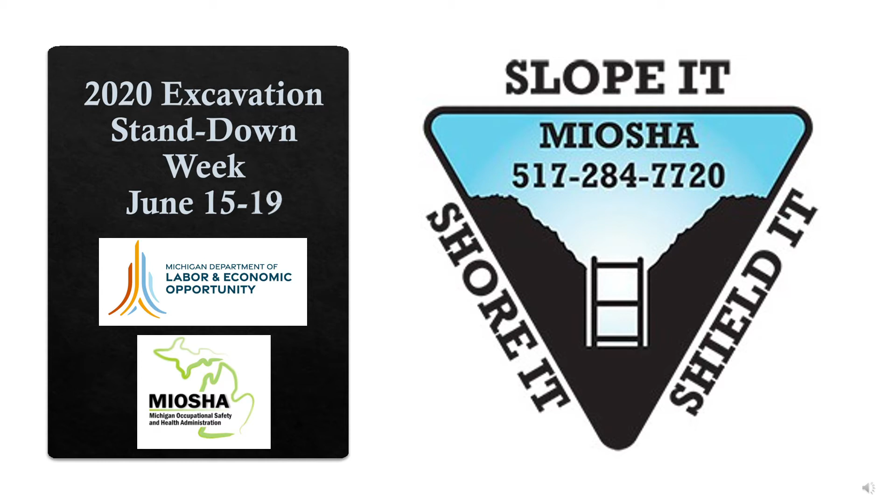This month's safety video will align with the 2020 Excavation Stand Down Week, which is the 15th through the 19th of June. It's put on every year by MIOSHA to increase the awareness and the importance of trench and excavation safety.

So here's some statistical data relating to construction fatalities and also excavation fatalities. So you can see that ultimately over the last 28 years, we've definitely been trending down. But if you look prior to 2007, we had some peaks upwards for total construction fatalities, just under 35, which is definitely unacceptable. Following 2007, you're looking at the excavation fatalities kind of stay steady at 1, maybe peaking at 2. And then we had a spike in 2016 for total construction fatalities, although the excavation fatalities remain unchanged.

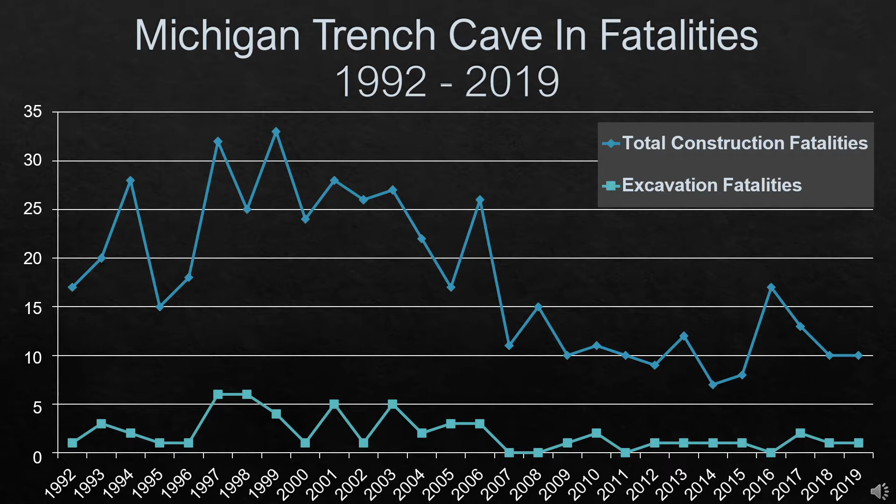So ultimately, our goal is 0 for both construction fatalities and excavation fatalities, and that's what we need to strive for each year. Now we're going to take a look at some of the top violations that MIOSHA has cited over the last couple of years. The first being having a qualified person on the job site. We'll go into that further. Spoil piles, MISS DIG, access and egress out of a trench or excavation, and also cave-in protection.

So the first heavily cited violation is a qualified person. So that's just having a qualified person on site, having that qualified person understand their roles and responsibilities, and also having that qualified person be able to perform routine inspections on any trench or excavation to check for evidence of any possible hazards, slides, or cave-ins, and be able to stop work in any of those situations that exist.

You may have also heard of a competent person. The two terms, qualified and competent persons, are synonymous. OSHA uses the competent person term, and MIOSHA uses the qualified person term. At the end of the day, it's just important for the qualified person to always be on site to be able to perform these inspections, but also if any type of inspection were to be completed by MIOSHA, that person needs to be able to identify themselves as the qualified person on site who is able to carry out their roles and responsibilities.

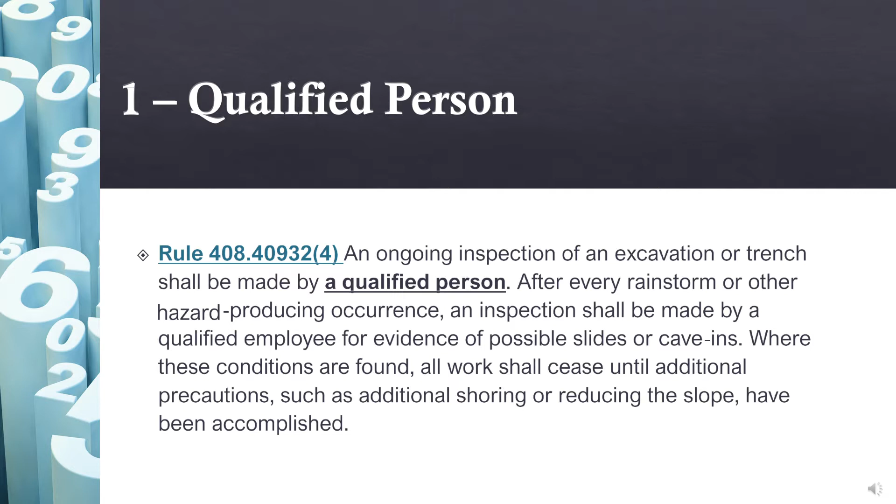The next heavily cited violation is spoil piles. This should also include any type of materials and equipment that are also present on the job site or near an excavation. It is vitally important that these spoil piles, any materials and equipment, remain 2 feet from the excavation edge. This is to prevent any of the spoil pile from entering back into the excavation, or any materials and equipment falling into the excavation where workers may be present. It is important to always measure if you're unsure and maintain that 2 feet at all times.

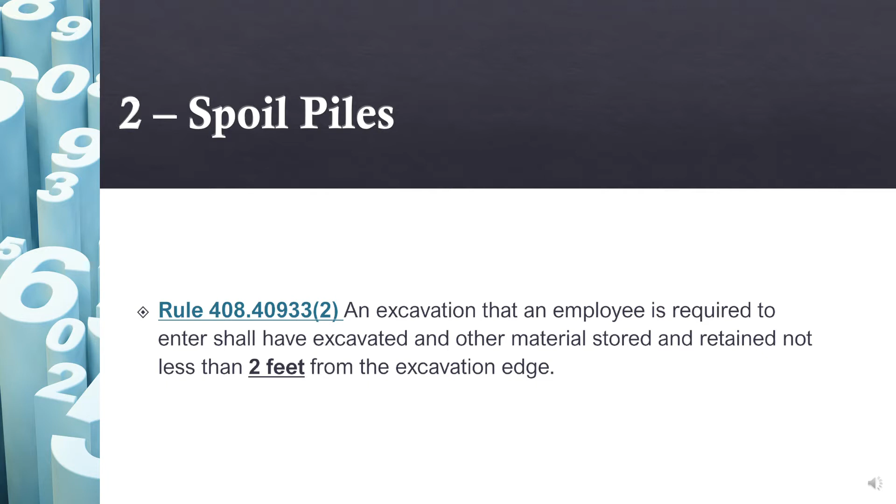Next, we're going to talk about MISS DIG 811, also known as Public Act 174. And this requires any company or any persons to contact the MISS DIG system via 811 3 days prior to any excavation to have all of the public utilities marked so they're able to be exposed and not damaged. This is not only for the safety of the public, but this is also for the safety of the employees that are present on the job site.

This is regulated, and compliance is assured through MIOSHA, but also through the MPSC. And because we work for the utilities, the MPSC does look at us heavily to ensure that we are following Public Act 174, that we're calling in tickets 3 days in advance of construction, but also that we're checking positive response to ensure that all public utilities in that area where the excavation is to be conducted have responded, and all utilities have been marked.

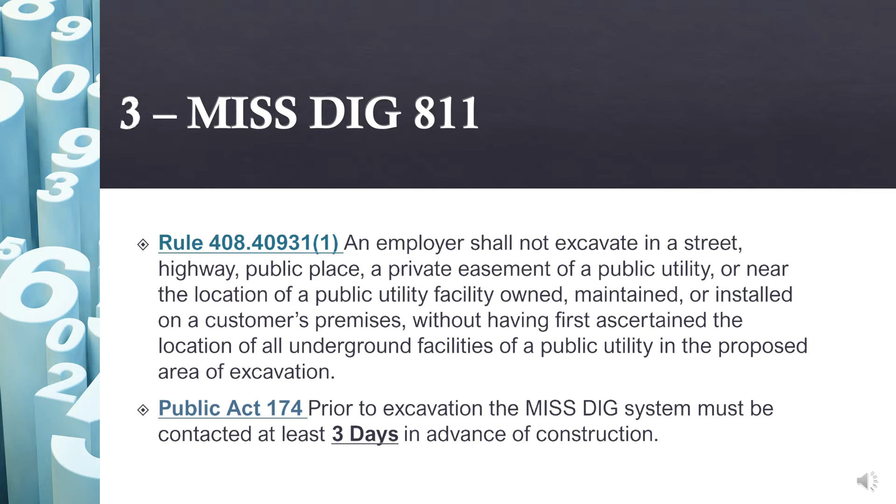So having access and being able to egress out of a trench or an excavation is one of the single most important things in trenching and excavation. It is required in any excavation or trench 4 feet or more in depth, but can be used in anything less than that. You know, when you're talking about trying to enter an excavation, if you're talking about uneven ground, it's better not to be jumping in or dropping into an excavation. It's better to properly go down the ladder and make safe entry into the excavation or trench.

It's also important that, when you're talking about lengthy trenches or excavations, you have a way of access and egress not to exceed 25 feet. So you need to be within 25 feet of any ladder or ramp to be able to egress should any protective system fail or any of the trench or excavation conditions, soil conditions change.

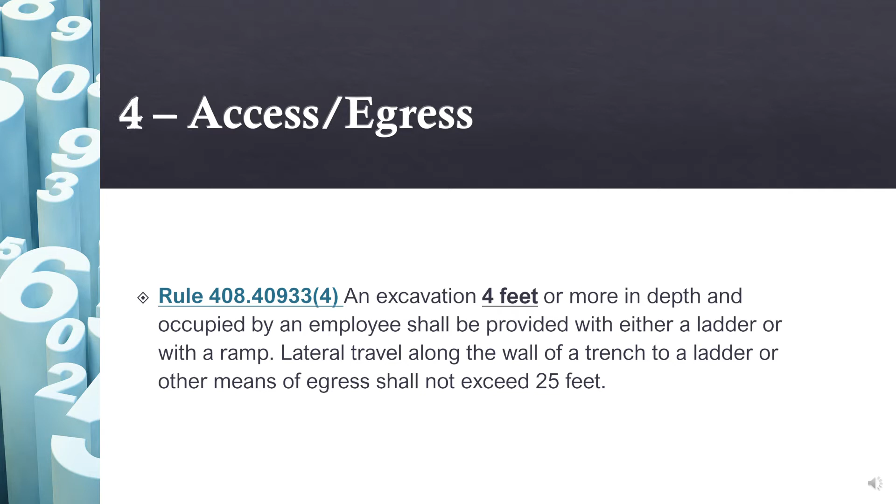Cave-ins are responsible for the majority of fatalities from any trench or excavation. So it's important that we follow this rule to a T and that we ensure that we have a protective system in place in any excavation 5 feet or greater. It's not saying that if you have unstable soil less than 5 feet that you don't need a protective system, but this is the rule and this is what is regulated by MIOSHA.

We've all been on job sites and seen other contractors put their employees at risk in excavations much greater than 5 feet with no protective system. We are definitely not that company, and that's not how we're going to conduct ourselves. So it is important that the qualified person on site ensures that if he has an excavation that's 5 foot or greater anywhere along the perimeter of the excavation, that we have a protective system in place and that it is used properly in accordance with the manufacturer's specifications.

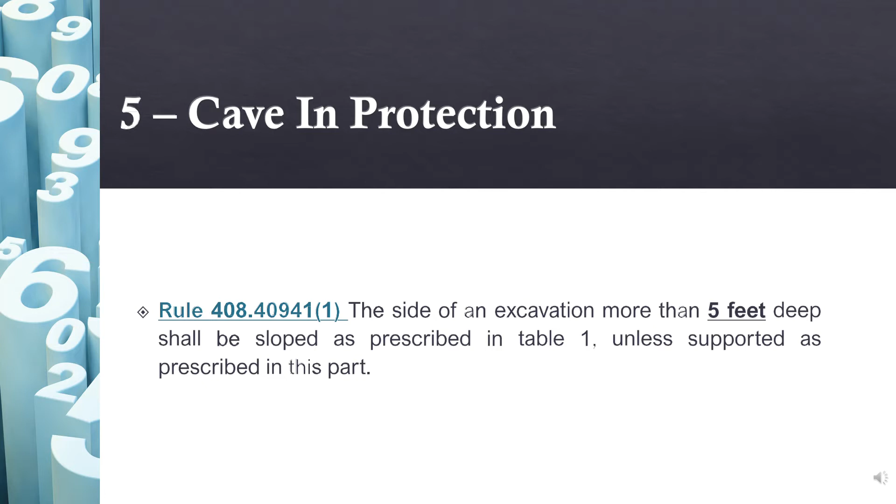Okay, to review some of the things that we talked about and also to go over an easy way to remember the basic rules for excavation and trenching, we're going to go through the 1, 2, 3, 4, 5 rule. So the first is at least one qualified person must be present on a job site. This qualified person needs to understand their position, needs to be able to do routine inspections to make sure conditions do not become hazardous. And if they do, they need to call for the stop work or immediate egress out of the excavation or trench.

Next is spoil piles, materials, and equipment shall remain 2 feet from the edge of an excavation or trench. This is pretty self-explanatory, and again, the 2 foot does not need to be encroached upon. Next, ladder shall extend at least 3 feet above the excavation or trench. If you're using a ladder as an egress point, you need to see 3 rungs outside the top of the excavation, and that will give you your 3 feet. And that is to be able to have a handhold when you're exiting onto the landing area outside of the excavation.

Next, ladders are required in excavation or trenches greater than or equal to 4 feet. You need to have a way to egress if you're in a trench or excavation that is 4 foot or greater, but also any excavation that you feel like there's uneven ground, that you feel like a ladder will be safer to use, there's no harm in doing so.

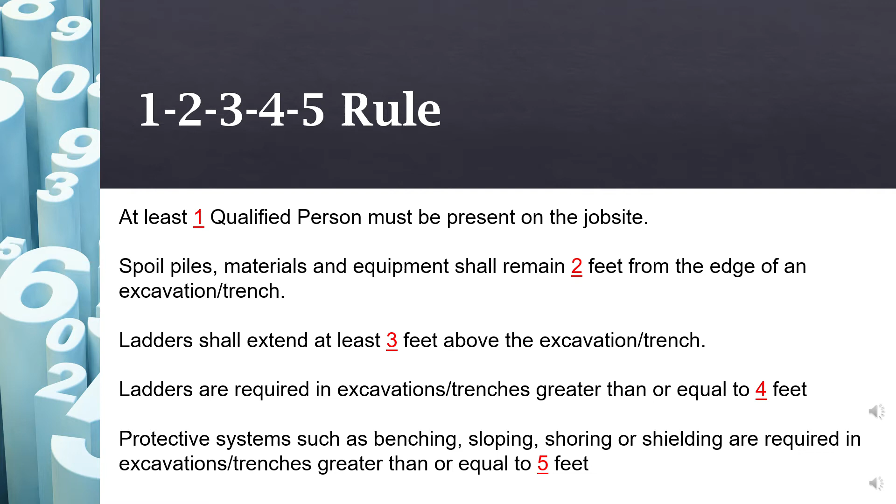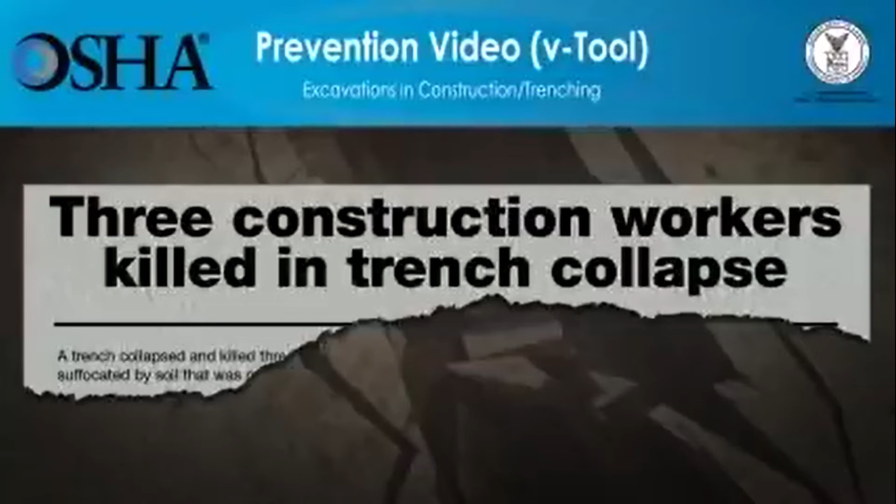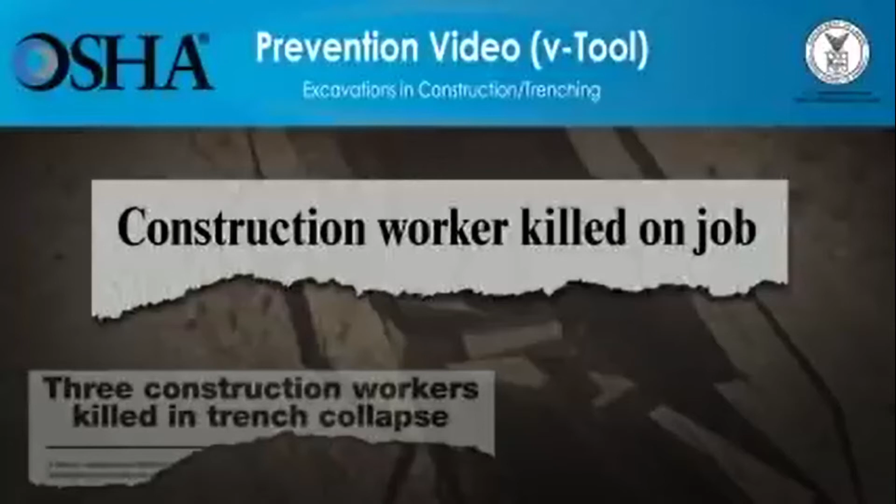In the U.S., more than 800 construction workers die every year while on the job. One of the most dangerous types of construction work is trenching, which kills on average 40 workers every year. Workers can suffer death or serious injury within minutes of being caught in a trench cave-in. But these deaths can be prevented. The video you're about to see shows how quickly cave-ins lead to workers' deaths. The video will also show what employers must do to assure that the work can be done more safely. Employers have a responsibility to provide a safe workplace and required protective equipment. You'll see that using the right type of protection saves lives. Please be advised, the scenes you're about to see deal with deaths at construction sites and might be disturbing for some people. All scenes are based on true stories.

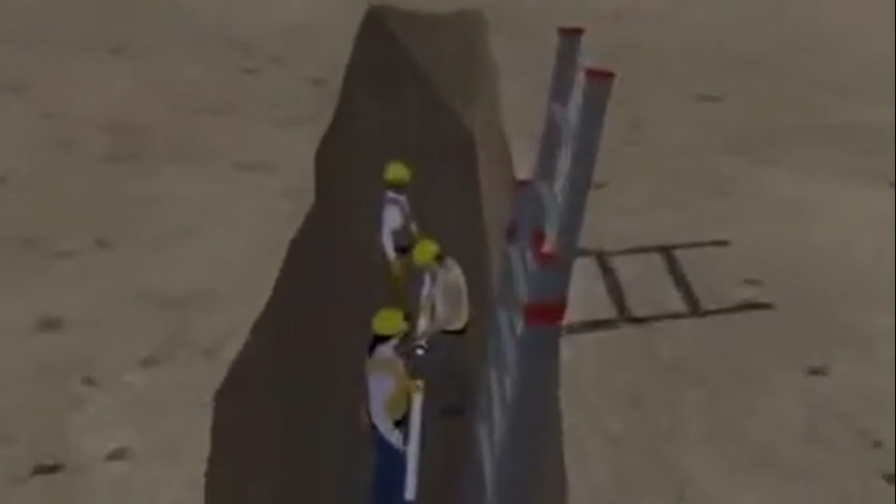5 workers were putting a sewer pipe into the bottom of a trench with a ladder nearby to enter the trench. There was nothing in place to protect the workers inside the trench if the walls collapsed. While the workers were inside the trench, one side began to collapse. 2 workers were able to climb out using the ladder, but the other 3 workers were buried in the soil and unfortunately suffocated to death from the weight of the soil. Let's look at the events leading up to this tragic incident and see how it could have been prevented. Employers must follow OSHA rules to protect workers in trenches. However, here, the employer did not follow OSHA's rules, which led to these workers losing their lives. Let's go over the main points of OSHA's rules for trenches to see how to keep workers safe.

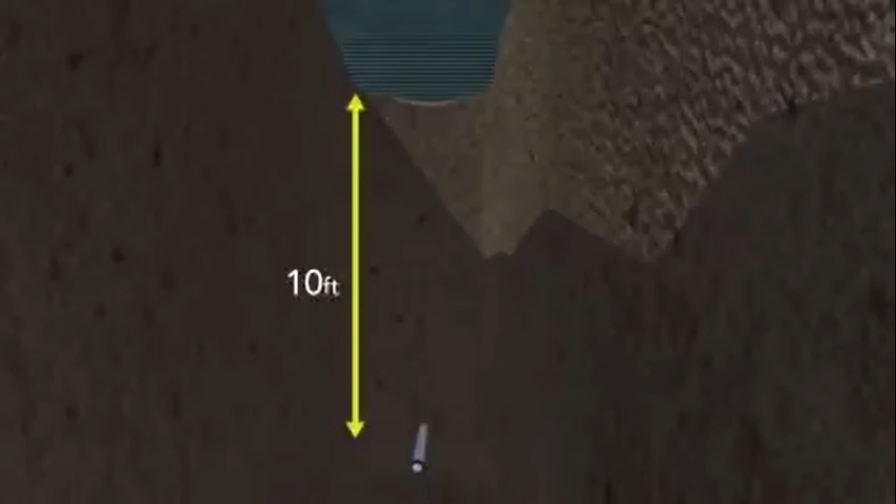All trenches must follow OSHA's rules. 1 cubic yard of soil can weigh as much as a car, nearly 3,000 pounds. So unless the trench is cut entirely into stable rock, protection against cave-ins must be used for all trenches more than 5 feet deep, or for any trench that shows signs of cave-in. Before workers can do any work in a trench, a competent person must conduct an inspection to identify and remove any potential hazards. A competent person is someone who can recognize hazards in the area and who has authority to take quick actions to eliminate the hazard, which may include temporarily stopping the work. Inspections must be performed at the start of every shift, after a rainstorm, or whenever conditions change.

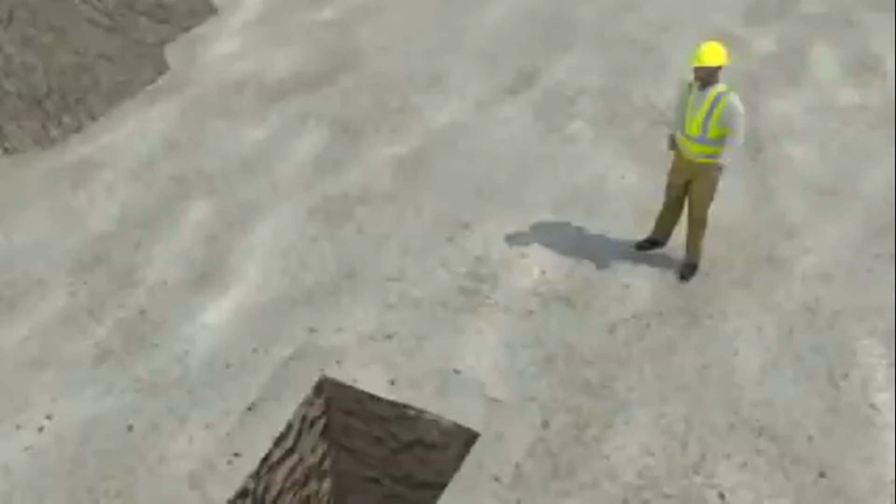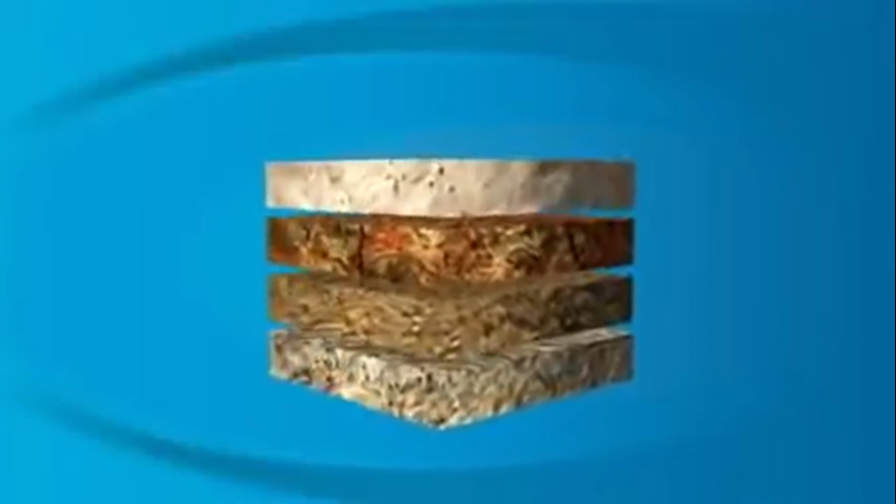The competent person must also test the soil in a trench. OSHA requires at least 1 test by looking at the soil and at least 1 test by hand. If a person knows the soil types, they can pick the right protective system to keep workers safe when they're in trenches. OSHA classifies soil in a trench as stable rock, Type A, Type B, or Type C soil. Stable rock is the safest soil for a trench.

Type A is the next most stable, and then Type B. And finally, Type C soil is the least stable. It's important to remember that trenches can have different types of soil based on depth and climate conditions. The competent person can choose from different protective systems for a trench, based on the types of soil found.

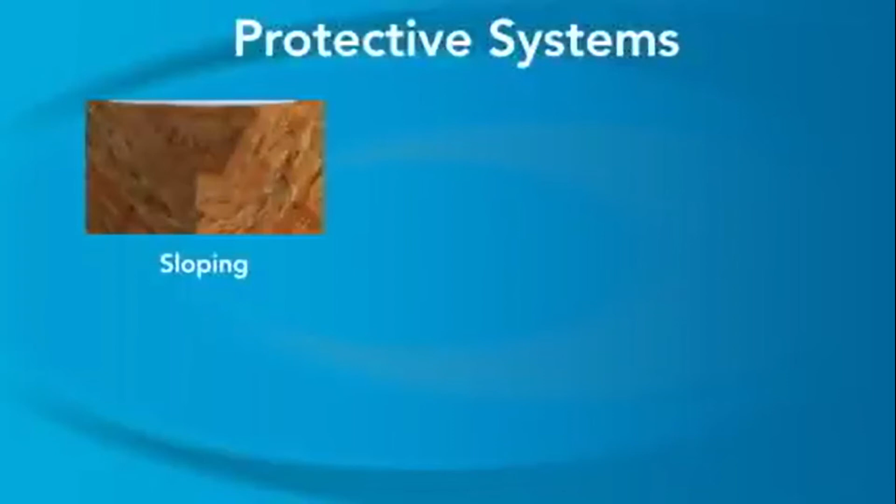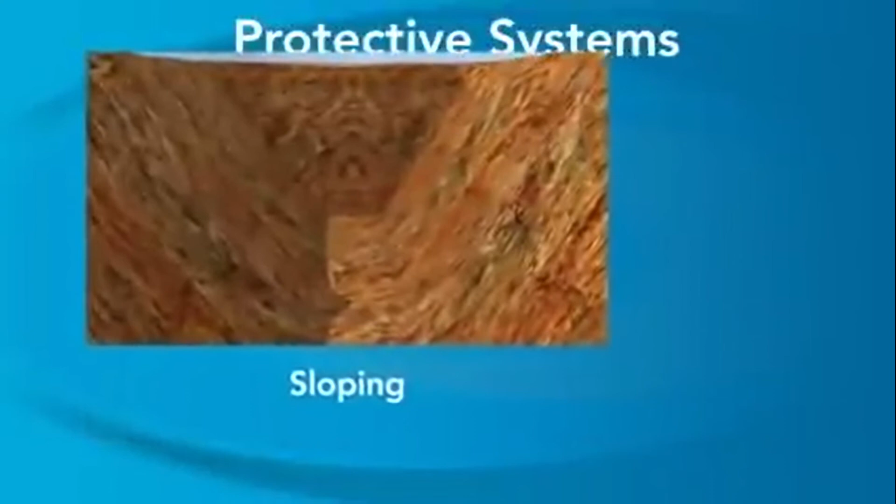For all trenches deeper than 5 feet deep, or for any trench that shows signs of cave-in, OSHA requires sloping, benching, shoring, or shielding to protect workers from cave-ins. Let's review each of these systems and then see how each one could be applied to the cave-in incident shown earlier. We'll look at sloping first.

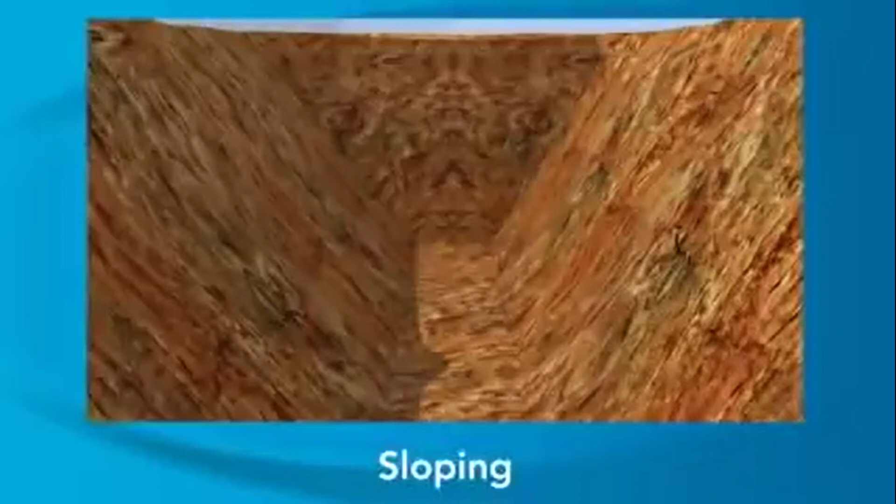Sloping protects workers by cutting back the sides of the trench so the sides slant away from the trench. OSHA's rules identify the degree of slope allowed for each of the different soil types. When trenches are less than 20 feet deep, these are the basic maximum allowable slopes for each soil type. Stable rock can be vertical walls, but cannot be undercut.

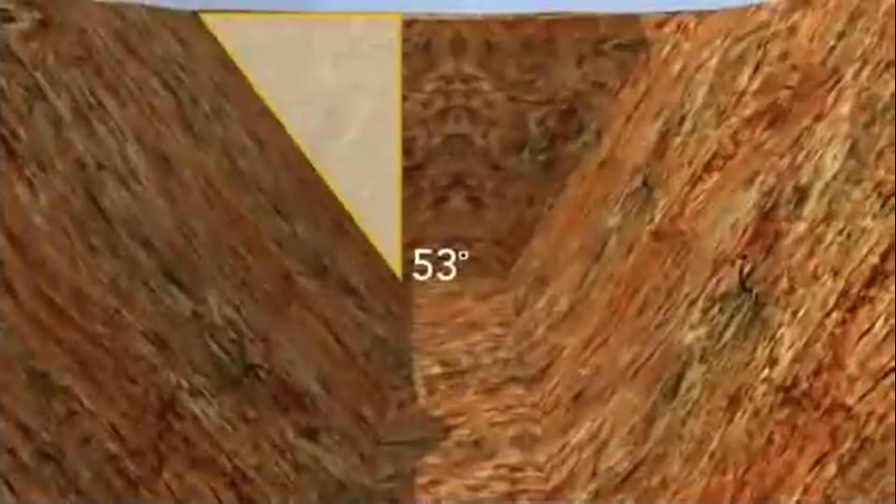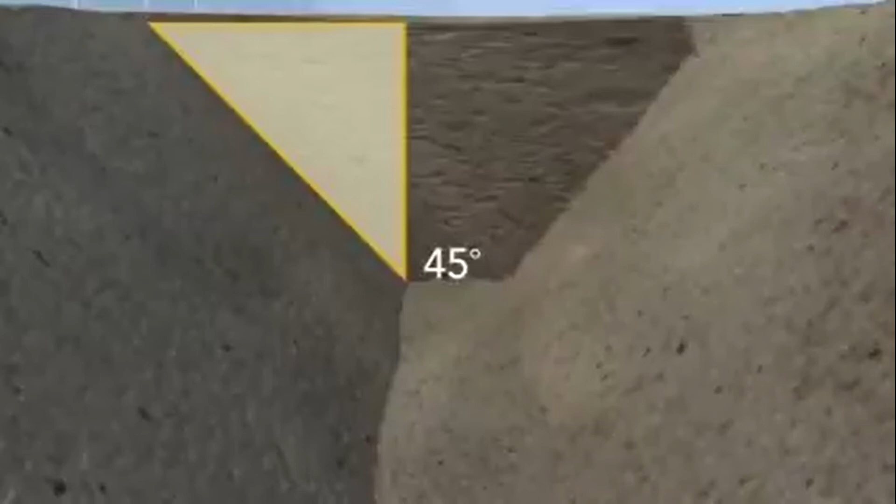For Type A soil, OSHA requires that the walls be sloped 9 inches out for every 1 foot of trench depth. For Type B soil, OSHA requires that the walls be sloped 1 foot out for every 1 foot of trench depth. For Type C soil, OSHA requires that the walls be sloped 18 inches out for every 1 foot of trench depth. It's important to note that this kind of sloping can only be used for trenches less than 20 feet deep. Any deeper, and the protection must be designed by a registered professional engineer.

So now, let's look at the workers in the original scene who were stuck in the trench as it started to cave in. But this time, the soil has been classified as Type B. The trench has been properly sloped, and the spoil pile is moved away from the edges of the trench. The trench walls are not caving in, and the workers are safe while they work.

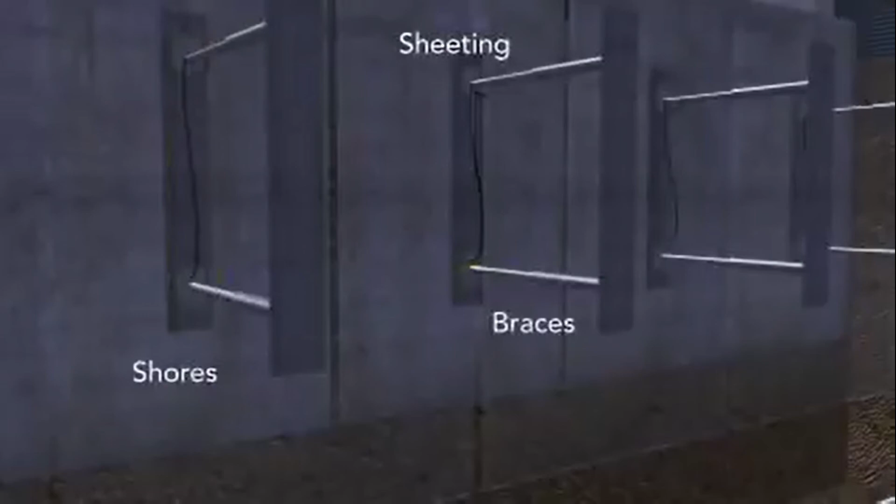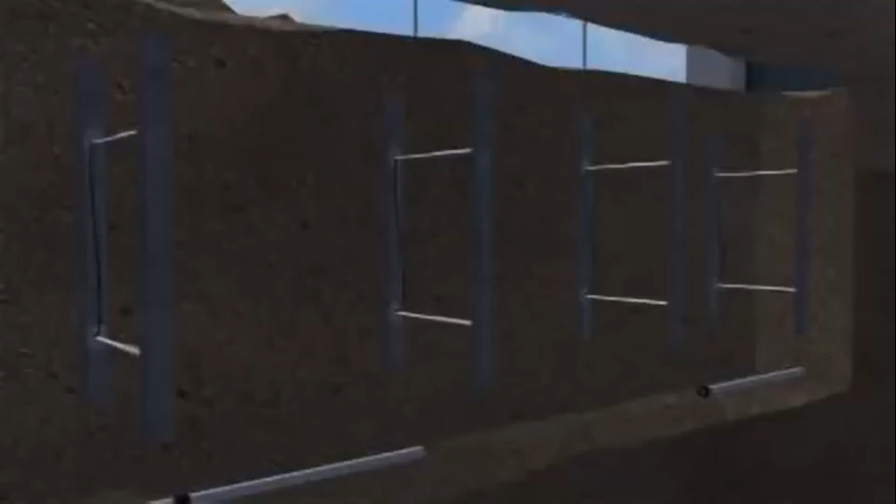Now let's review the shoring type of protective system for trench workers. Shoring uses various support systems to prevent soil and the trench walls from moving. There are different kinds of shoring systems, but timber and aluminum hydraulic are the 2 basic types. Aluminum hydraulic cylinders are the most common type of shoring, and they are typically installed using spot bracing, plywood, or stacked methods. To install the shoring correctly, you must first determine the soil type.

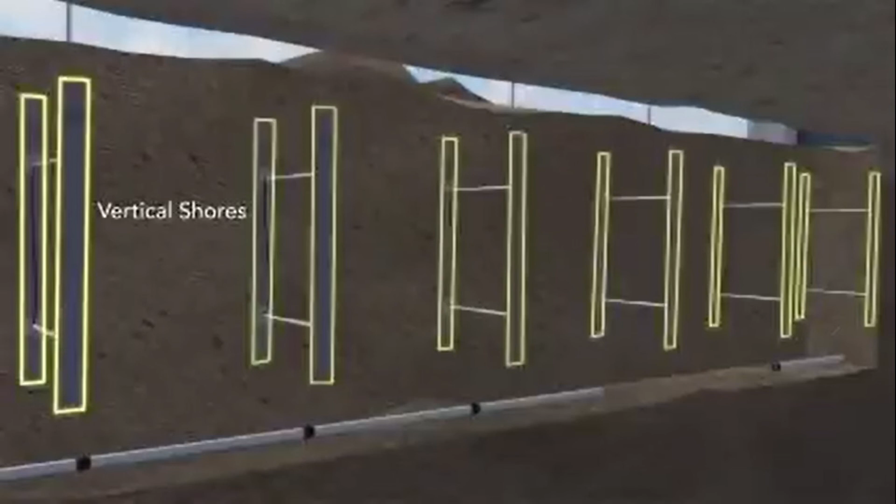The type of soil and depth and width of the trench determine the maximum vertical and horizontal spacing used with the members of the shoring system. If we use our example of a 3-foot wide, 10-foot deep, 40-foot long trench in Type B soil, the shoring system being installed would need to include 12 strong aluminum vertical shores, with 6 on each side of the trench.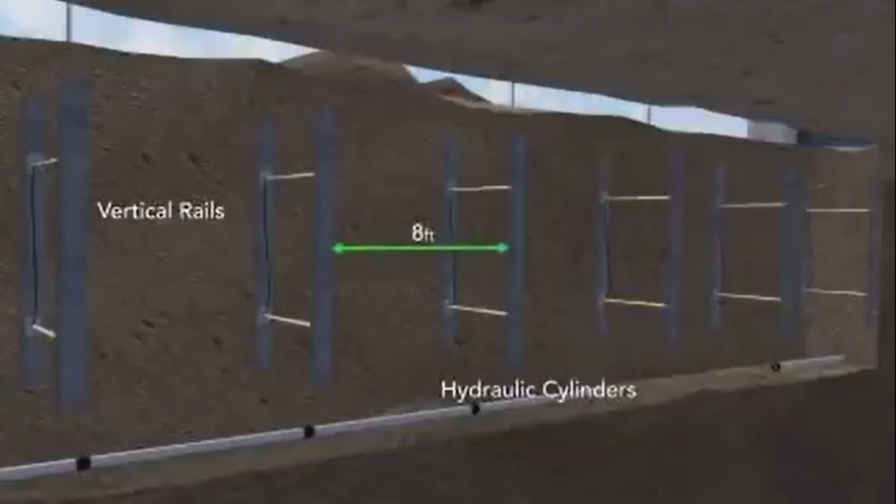These shores, also called rails, will be connected by hydraulic cylinders every 8 feet along the length of the trench. A hand pump pressurizes the hydraulic cylinders until they fit tightly within the rails. Now that the shoring's in place, let's look again at the workers in the trench at the beginning of the video. As before, the workers are laying a sewer pipe into the bottom of a trench. But now the shoring system prevents the trench walls from caving in and keeps the workers safe.

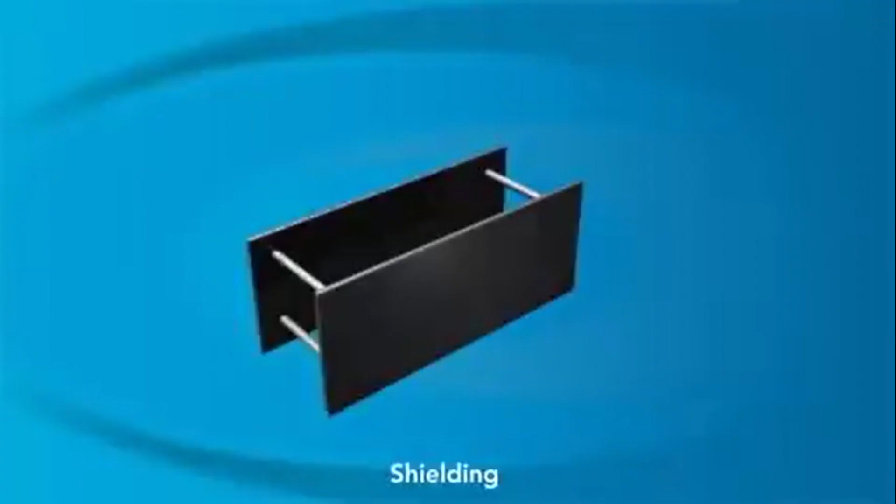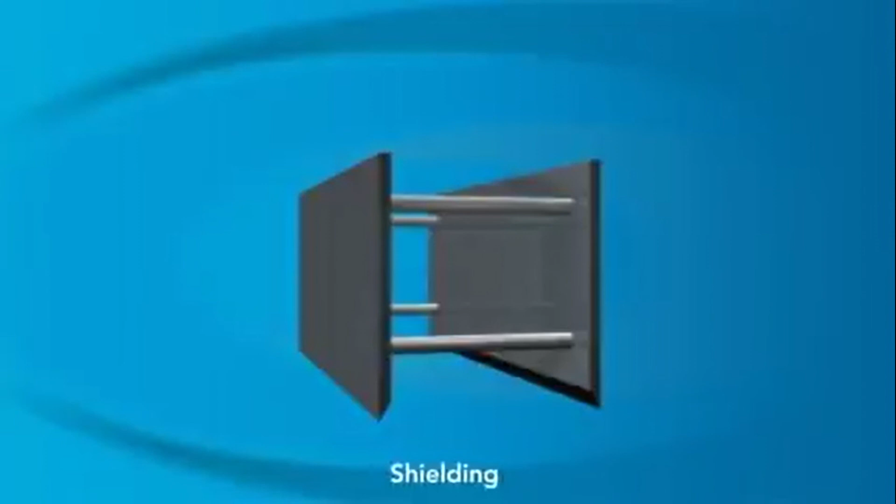Sloping and shoring are ways to protect the sides of the trench so they don't cave in. Now let's talk about shielding, which is a way to protect the workers when they're inside the trench. Shielding involves using trench boxes, also known as trench shields, or other supports to protect workers inside a trench from collapsing soil if a cave-in occurs. The competent person should pick a trench box that is right for the soil type and all other site conditions.

A trench box has 2 large plates, which are held apart by 4 horizontal cross members. These plates, or shields, must be between the sides of the trench and the work area. The shields are strong enough to protect workers inside from a soil collapse. The shields can be 2 feet above the bottom of the trench as long as they can support the entire depth of the trench and there's no caving under or behind the shield.

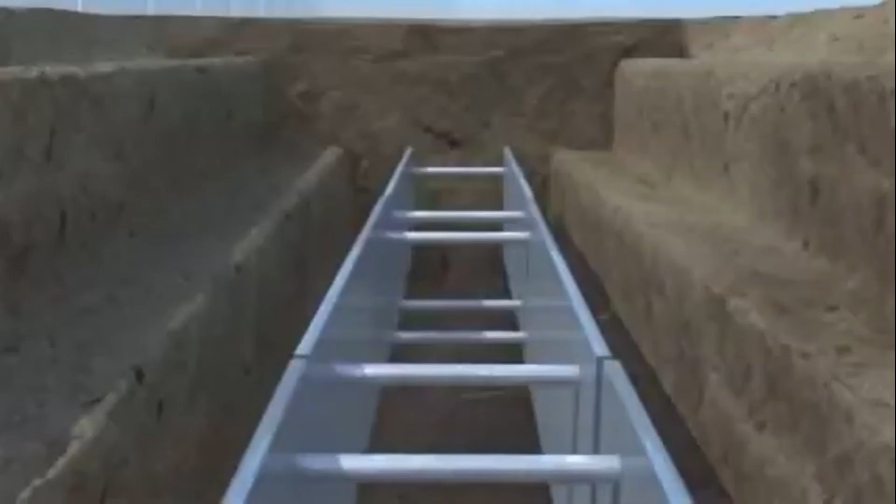The top of the shield should extend at least 18 inches above the level of any materials that could cave into the trench. Trench boxes are typically used in open areas, but they can also be used with the sloping methods discussed earlier. So let's see how a trench box could have saved the workers that we saw at the beginning of the video. For our example, we'll assume that the workers are in a trench with Type C soil and no sloping, but working inside a trench box. This time, as the workers lay the sewer pipe into the bottom of the trench, they are protected from any possible cave-ins.

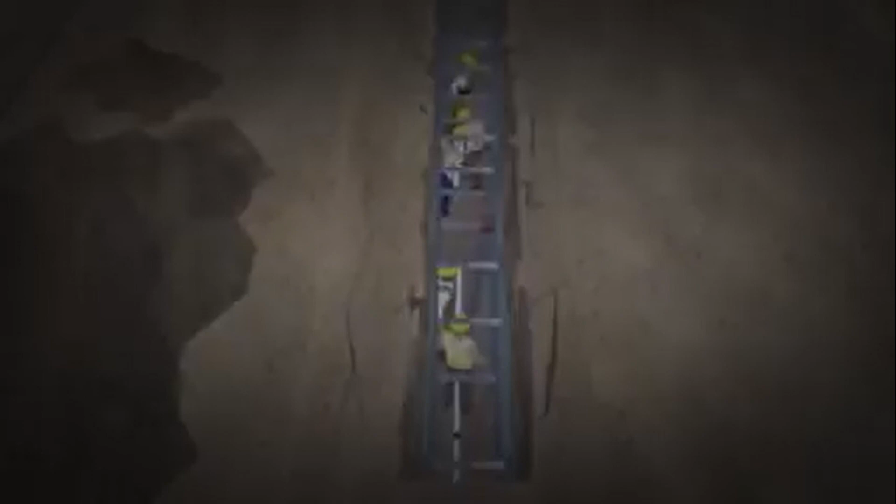This example shows the importance of employers following OSHA's excavation standards to ensure that workers are provided with a safe workplace. These types of construction deaths are preventable. The trench cave-in prevention measures shown here save workers' lives. Use these protections on the job. It could be the difference between life and death.